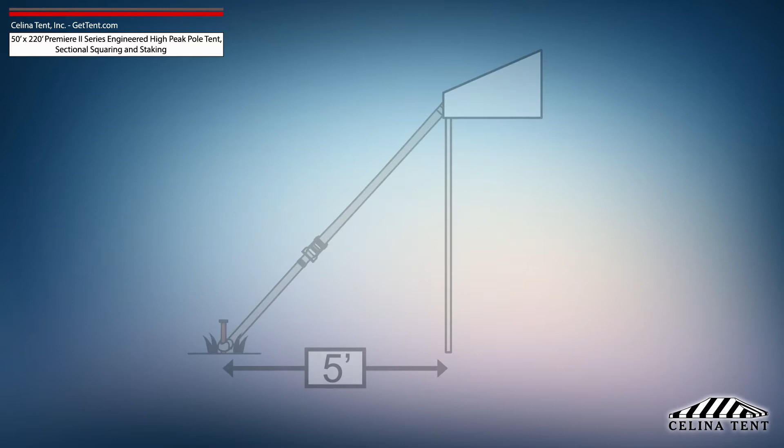This video covers squaring and 5-foot staking applicable to a sectional 50-foot by 220-foot Premiere II Series high-peak pole tent from Celina Tent. 5-foot staking is standard for tents with an eave height of 7 or 8 feet and would need to be adjusted for eave heights other than this standard.

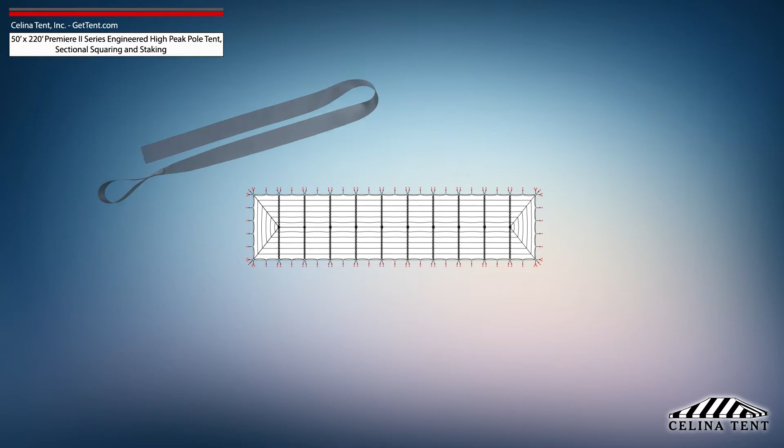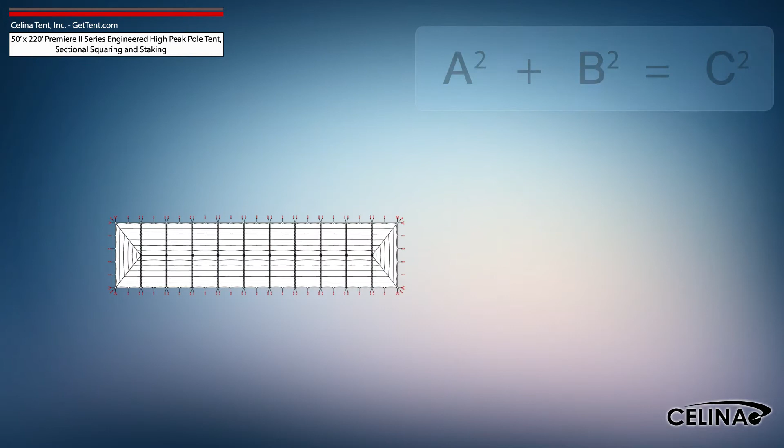Tent squaring allows the installer to accurately place all tent hardware and install tent stakes prior to beginning setup, and helps them avoid any marked underground utilities. Utilities must be marked by your state's local utility services prior to any tent installation. Using the Pythagorean theorem and adjusting out for 5-foot staking, the entire tent footprint will be 60 foot by 230 foot, with a 237 foot 8-inch diagonal length.

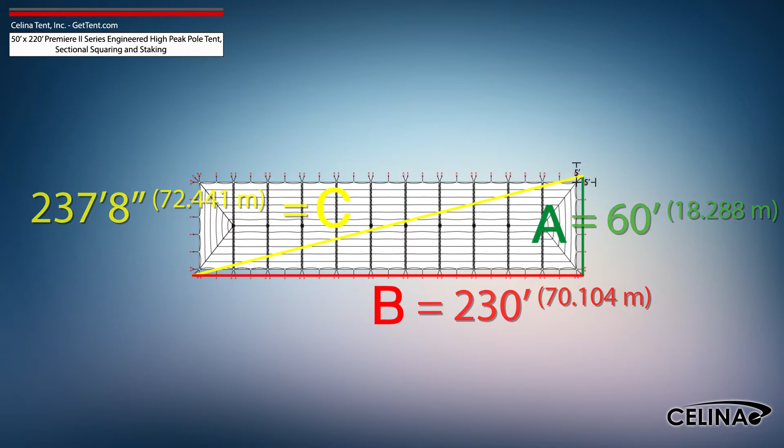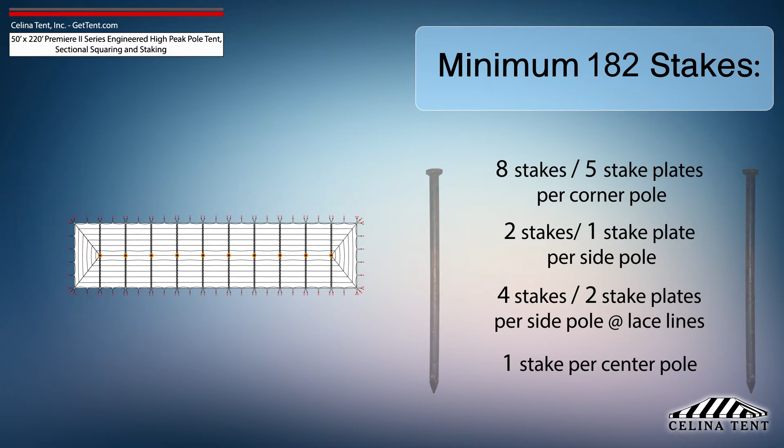Celina recommends that a 50 foot by 220 foot Premiere II Series high-peak pole tent receives a minimum of 182 stakes. 8 stakes and 5 stake plates for each corner pole, 2 stakes and 1 stake plate for each side pole, 4 stakes and 2 stake plates for each side pole at lace line locations, and 1 stake for each center pole. This amount of stakes provides the minimum amount of security for a pole tent of this size. Additional staking is required for any site that doesn't meet optimal soil conditions.

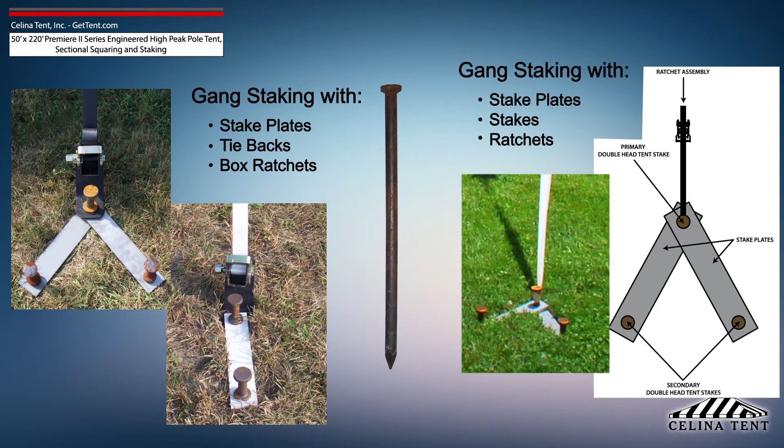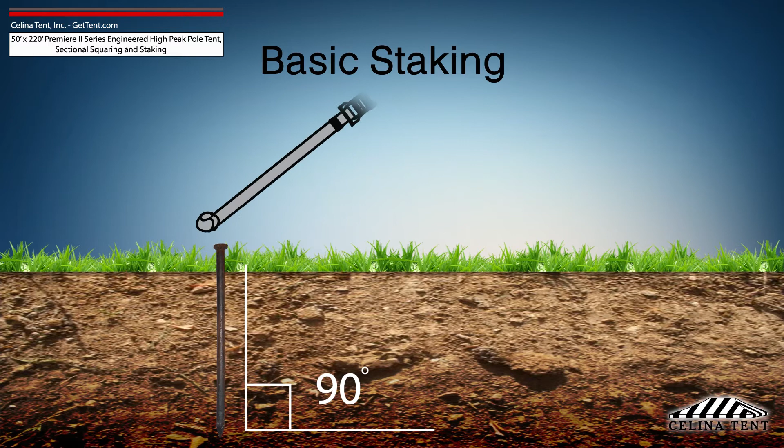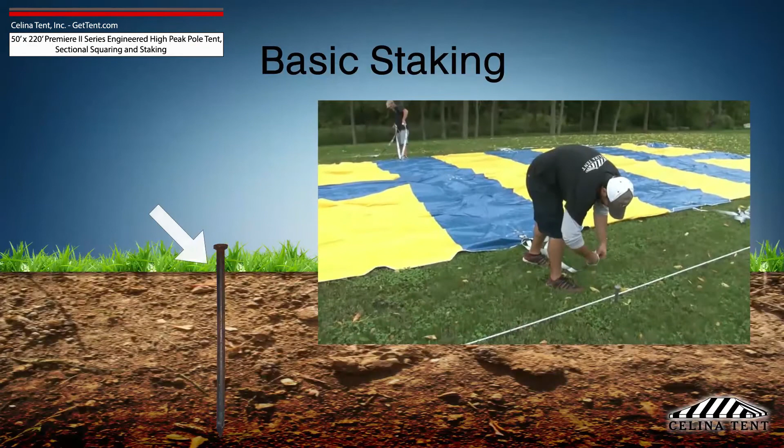Tent staking is the most important safety procedure during tent installation. Tent stakes should be driven vertically so that the stake is as close to the ground as possible with space to tie on a strap. Any length of stake protruding from the ground that is more than 6 inches will have detrimental effects on the holding power of the stake. Attach the ratchet strap or rope as close to the ground as possible to reduce strain on the stake.

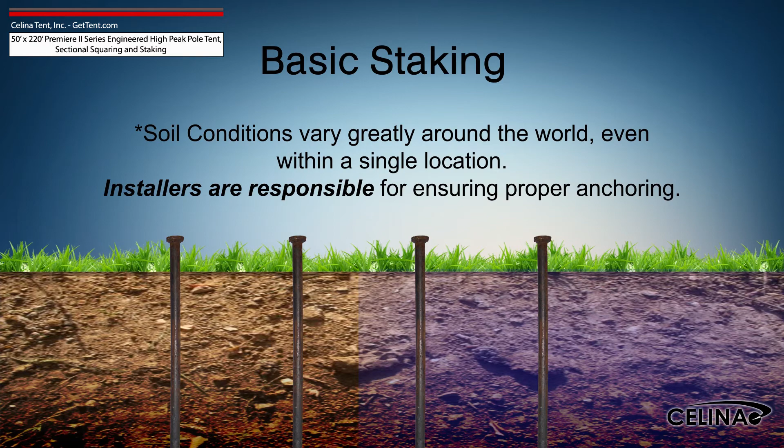It is the installer's duty to inspect the soil conditions and possible weather effects for the duration of the tent installation. For water-saturated or loose soil, more tent stakes are required to achieve adequate anchoring. Staking may be increased using dual stakes and a staking plate, or gang staking utilizing 2 staking plates and 3 stakes.